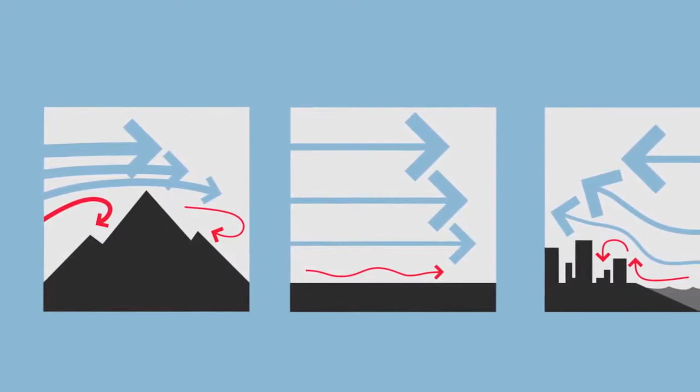Let's start with understanding how wind works. Wind is a fluid. Wind bubbles and moves around objects. It eddies like a stream. It travels between mountain passes, and it can curl around buildings within cities and can create geographically specific wind currents. Up high, with nothing in the way, the wind travels in a straighter line, but when obstacles are present, how do you predict which way the wind will move? How do you make wind movement work for you?

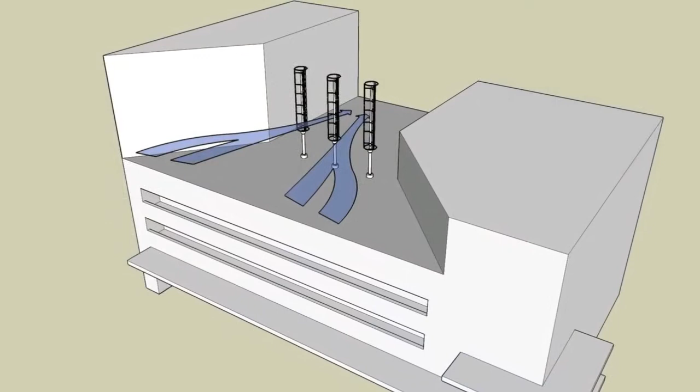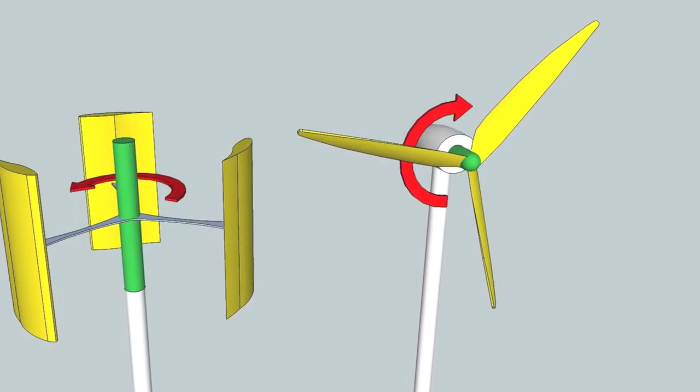The next set of constraints involves understanding what kind of wind turbine would work on a building. Of course, we're not talking about the large utility-scale wind turbines you see out on wind farms. Wind turbines also come in smaller sizes, and there are different designs of wind turbines. This image introduces you to two primary types. The familiar propeller-style turbine is a horizontal axis wind turbine, or HAWT. The propeller blades spin around a horizontal axis. Another design is a vertical axis wind turbine, or VAWT, where the rotor spins around a vertical axis.

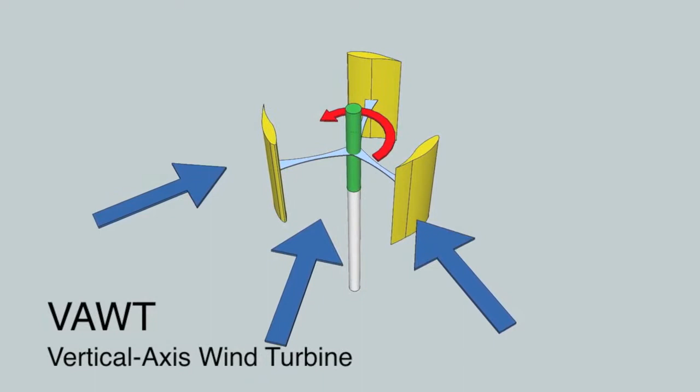One of the main differences in these two designs relates to how they capture wind and respond to changing wind directions. The propeller-style turbine must point directly into the flow of wind to spin, and rapidly changing wind directions will cause performance to suffer. On the other hand, the VAWT, or vertical axis wind turbine, can continue to operate through changes in wind direction.

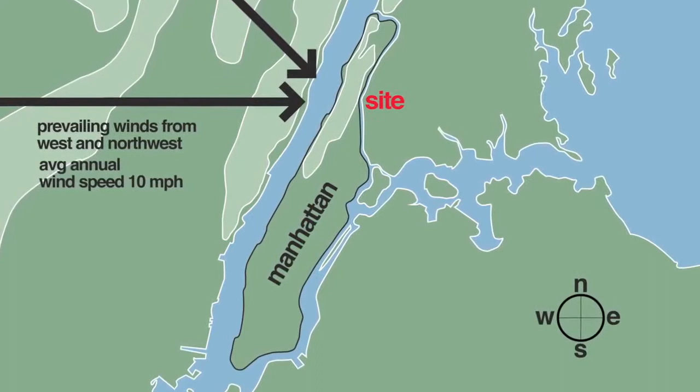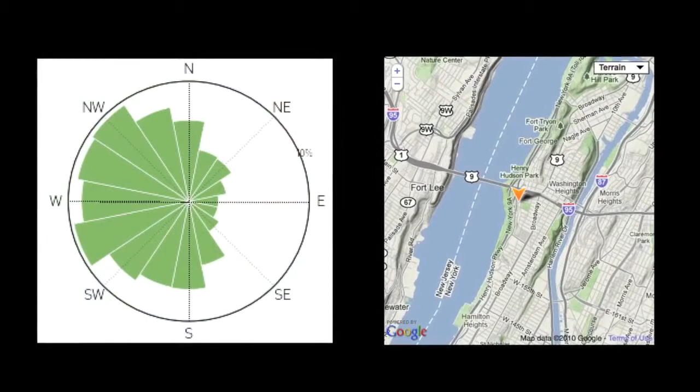The last set of constraints we needed to understand related to the specific site location. We needed to identify which were the obstructions to wind flow, or what would prevent wind from reaching our rooftop. Of course, we also needed to ask, which way is the wind usually blowing? This is known as the prevailing wind direction. For this city location, we knew the obstacles were mostly taller surrounding buildings. To learn about prevailing winds, we would be able to source some wind data from the broader New York City region. Next, we would have to determine which of the obstacles might cause the most turbulence at different spots on the roof.

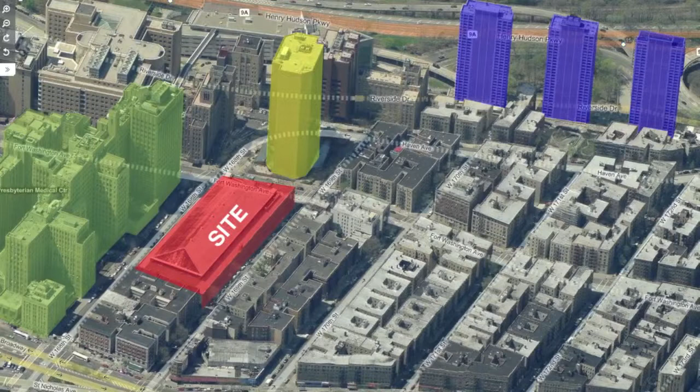You can see here our building site in red, and the large hospital to the south in green. That puts the rooftop in the shade for most of the day, precluding a solar energy installation. To the west, you can see additional obstacles that will interfere with airflow and cause unpredictable turbulence at some of the locations where the wind turbines might be placed.

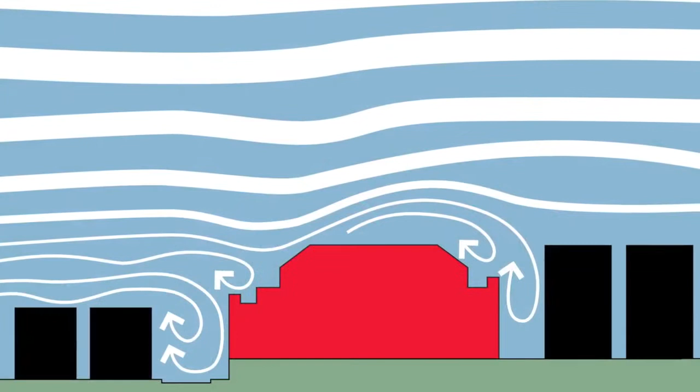We might expect flow from the northwest to look something like this. You can see the turbulence happening around the building and a wake being formed. You could also expect airflow to be turbulent in vertical directions as well, as wind has to move over obstacles and will curl back into a vacuum behind them.

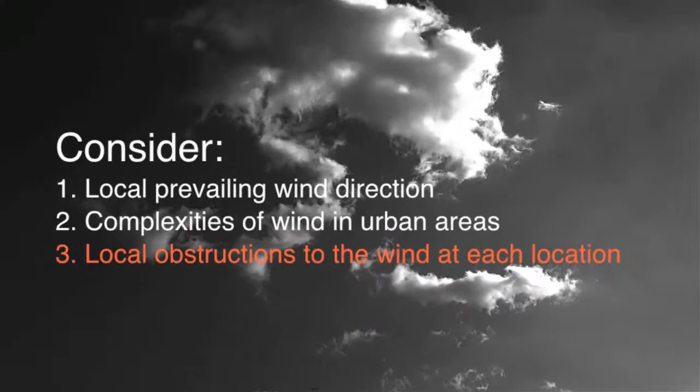Our client wanted to figure out which of these 5 sites on the building roof would be the best for the installation of potential wind turbines. Based on the information we've just presented, which of the 5 sites do you think is best for a wind turbine location? Don't forget to consider the local prevailing wind directions, the complexities of wind in urban areas, and the local obstructions to wind at each of the potential turbine locations.

Here's how we approached solving this problem. We first realized that we were going to have to find a way to quantify the effects of wind on our site. So we created a 3D model of the area buildings and applied a way to visualize fluid dynamics.

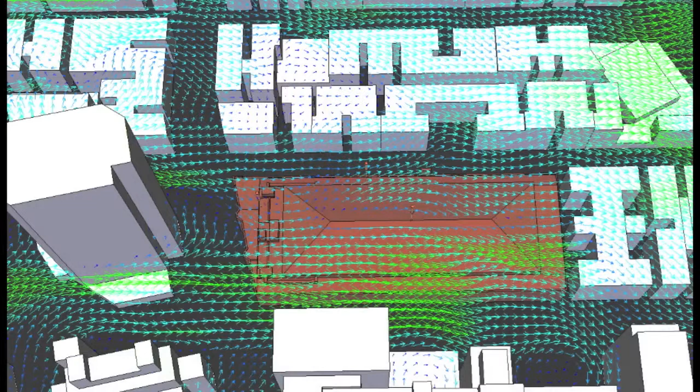Computational fluid dynamics, or CFD, uses computers to perform calculations to simulate the flow of liquids or gases in an environment. Typically, you might see CFD studies performed on 3D models of planes or cars. Through this, we would get not only data for different locations on the site, but also be able to visualize airflow for a clearer understanding of the predicted movement of the wind.

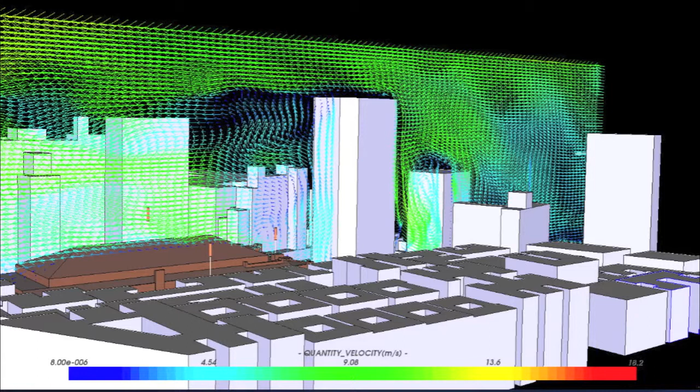We imported the 3D model and parameters needed to conduct our simulation into the CFD software. The parameters consisted of the estimated wind speeds, the variation in wind speed according to the altitude, and the surface roughness coefficients. And we ran simulations of airflow from the prevailing wind directions indicated on the wind rose data that we had of the general area.

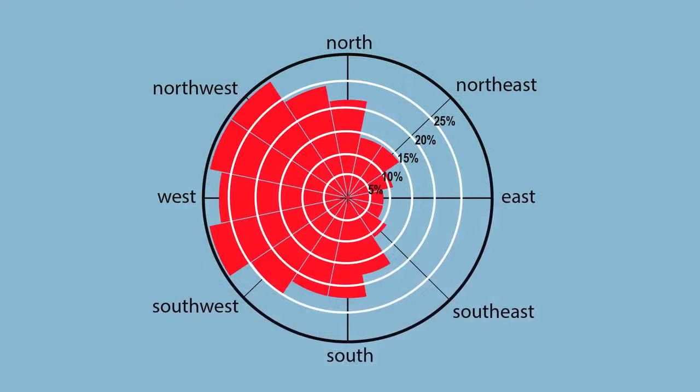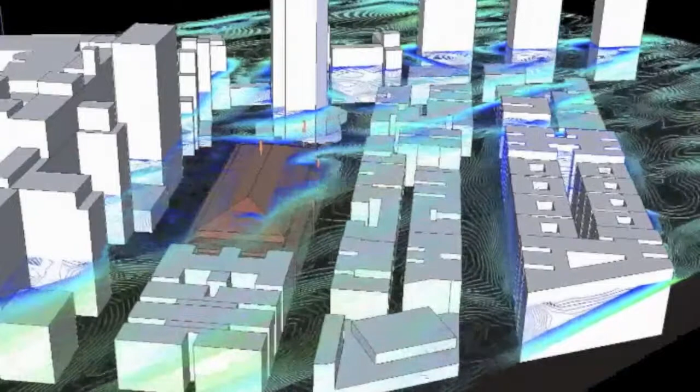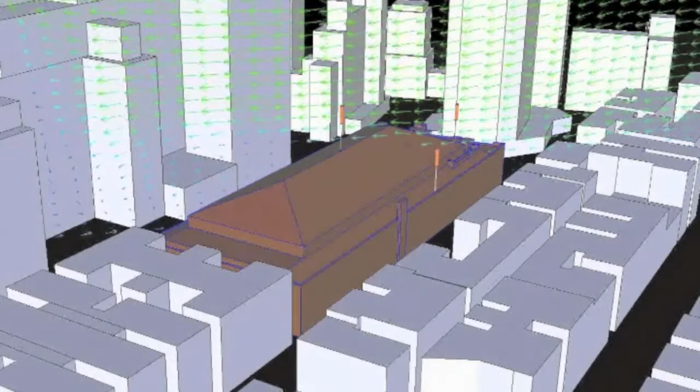Through an analysis of different slices from different directions, even vertical slices, we were able to look for updrafts, downdrafts, and understand how wind would flow at the different potential wind turbine locations. Here you can see that the wind is moving up and down with updrafts and downdrafts across the building, and that there is actually a void or lack of wind flow on the back side of the building in winds from the northwest.

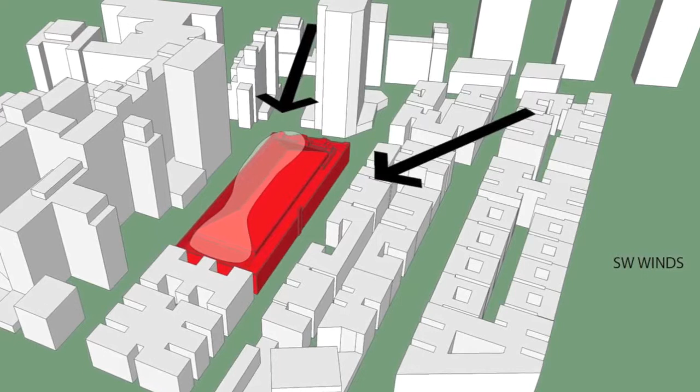In order to make our decisions, we built a matrix of airflow interactions on the rooftop site and looked for the locations that would have the least turbulence and the most consistent wind speeds. First, we studied winds coming out of the southwest and noticed where on the roof they would be the most consistent. Then we looked at flow direction coming from the northwest, and we started to see an overlap offering the same level of consistency. Finally, we looked at winds coming from the west and noticed the greatest overlap happening along the ridge of the building and more toward the eastern edge.

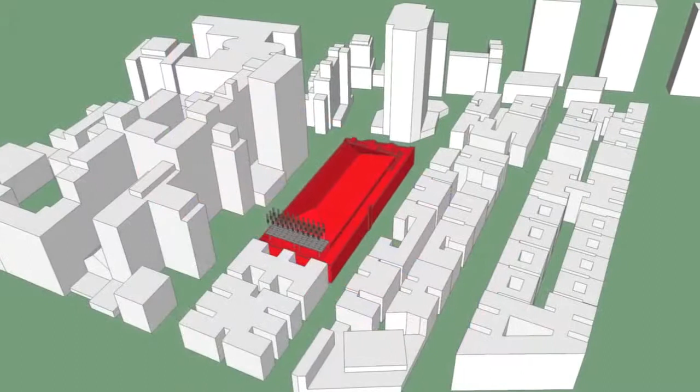This identified site number 3 and site number 5 as the best sites. We finally chose site number 5 as the optimal location for a wind turbine array. It offered the most consistency in wind, and it offered the least amount of turbulence. It also allowed easy access for a crane to do the installation, which would be far more difficult at site number 3.

We also had to recommend a wind turbine type based on the understanding that winds would often fluctuate and cause turbulence in this urban environment. We decided a vertical axis wind turbine would be more successful for this project. Again, vertical axis wind turbines can capture wind shifts instantaneously, and because they are less affected by turbulence, they also allow for more compact groupings. For this concept, we would be able to use lessons from new research to design a layout of turbines that could make the most energy possible from the least amount of space.

In the end, while this project was not built, our process of applying CFD simulations proved useful for analyzing wind energy potential in urban areas. We also learned that looking for solutions in other areas of study could lead to the design of more successful projects.

The research that most influenced this project and our idea to fit more wind turbines in the limited area is currently being conducted by Caltech researcher Dr. John Dabiri. Dr. Dabiri researches biomimicry, which studies how designs in nature can be imitated by technology. One area he has studied is how fish swim. Fish swim in schools, and as they swim together, they shed vortices with their tails. They stagger themselves to take advantage of these vortices, allowing them to swim more efficiently in tight formations.

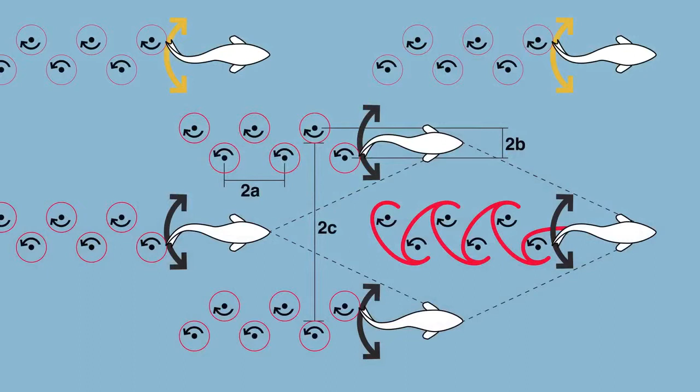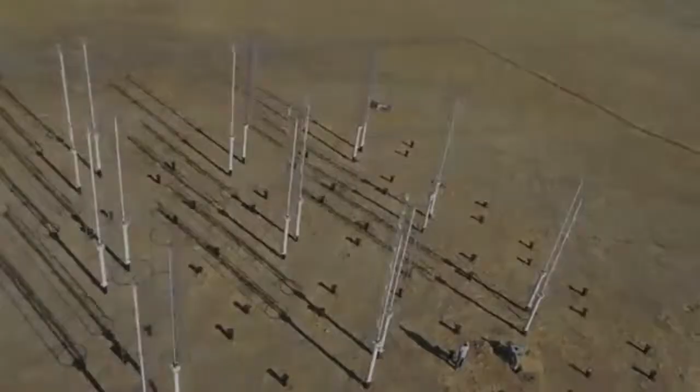Dr. Dabiri noticed a synergy in the math between this and how vertical wind turbines might work, and realized that if the turbines were spaced just right in an array, the turbine array could work more efficiently as well. Since 2010, Dr. Dabiri has been conducting experiments with vertical wind turbines and has shown that with the right arrangement, the turbine array can actually produce more power in less space. Continued research to incorporate other disciplines, such as computer engineering and advanced material science, could lead to more affordable and flexible wind energy systems.

Our study for a potential wind energy project involved many areas related to science and technology. It was necessary to have a clear understanding of specialties related to a variety of fields, from engineering, architecture, and urban design to computer modeling and renewable energy technology. What can you study to prepare to work with this type of project? Some of the areas you can choose to study include sustainable architecture, mechanical, electrical, and aerospace engineering, or information technologies. Programs of study can also include environmental sciences, biomimicry, advanced materials design, and even 3D modeling in geographic information systems, or GIS.

I have a degree in architecture and a long background in design and construction. I also have a passion for wind and sailing and understanding renewable energy technologies. In today's world, it is very important to combine specialized studies with knowledge and inspiration from other areas. By blending your studies with your passions and observations about the world around you, you'll be able to find creative solutions to the more complex challenges facing us today.